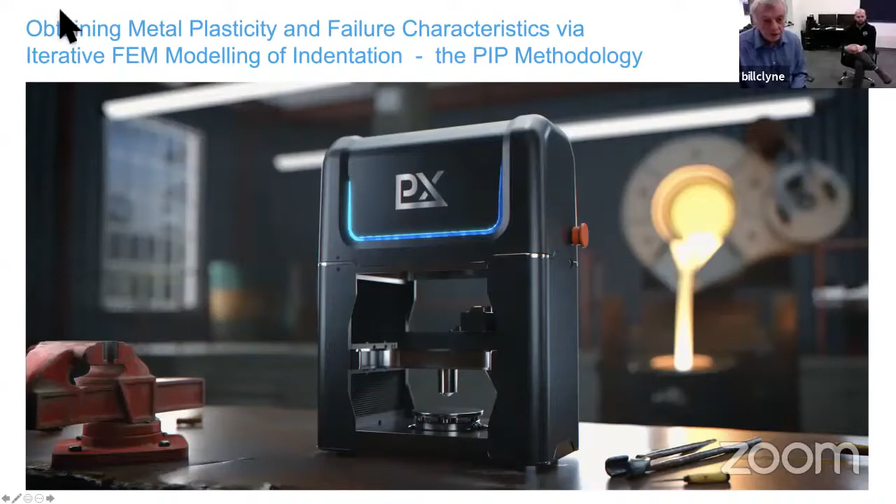So it is based on work that's been done in the university over the past couple of decades, really. But what's brought it into focus is that there is this startup company called Plastometrex, which is now marketing some products, and you'll hear a bit about the actual machine itself towards the end of the talk, although you can see a picture of it there. So let me just give you an introduction first to what is actually in the talk. So this is the structure.

I'm going to start off by just giving some background really to the concept involved. We call it PIP. It's based on making indents, measuring the indent profile, and then doing a repetitive, iterative FEM simulation of the process in order to converge on the best fit set of plasticity parameters. What we're trying to establish is the stress strain curve of the material. And although it does involve a lot of FE simulation, the whole thing takes place rather quickly. So, it's a rather tractable tool if you have an integrated system where you can make the load, create the indent, measure the profile, and then do the software, the iterative FE.

So here's the basic idea pictorially. You start by making an indent to a prescribed load using a spherical indenter, a relatively large spherical indenter. You measure the profile rather carefully, and then you need some kind of constitutive law to describe the plasticity. We use the Voce equation. There are alternatives, but you need to be able to simulate the plasticity.

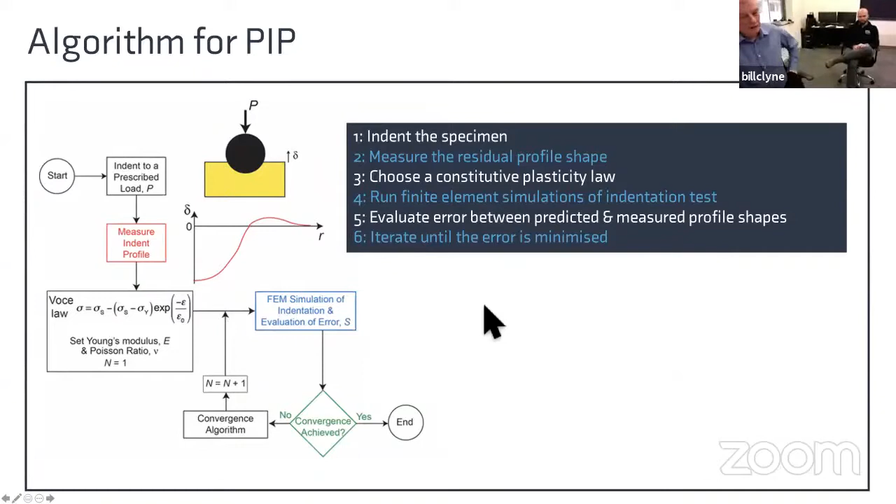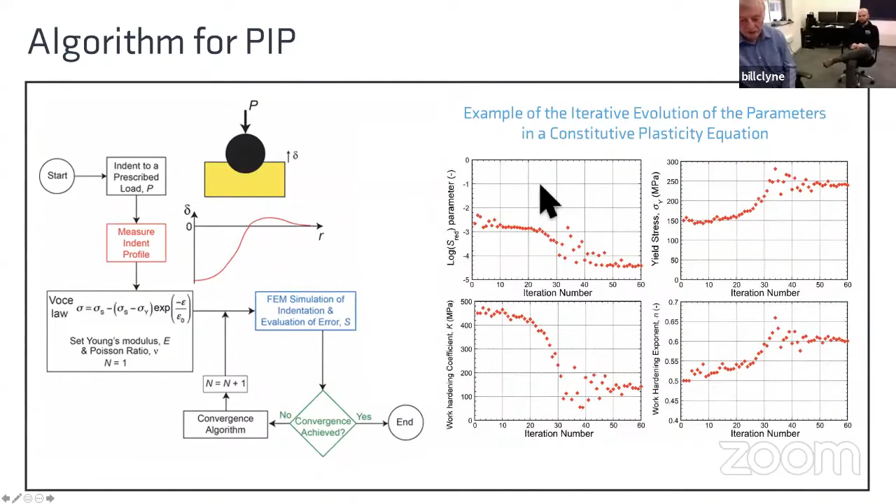So just emphasizing again the sequence, you create the indent using a large spherical indenter. You measure the profile. Here's some different profiles for different applied loads. If you're interested, you can start focusing on looking at the microstructure around the indents. This is showing these persistent slip bands in individual grains, so you can get some feel for what's actually going on inside the material. But the key procedure is then to repeatedly simulate the indentation process, and as I say, get the best fit between the measured and modeled profile, and then that gives you the true stress strain curve. That's what we're trying to obtain.

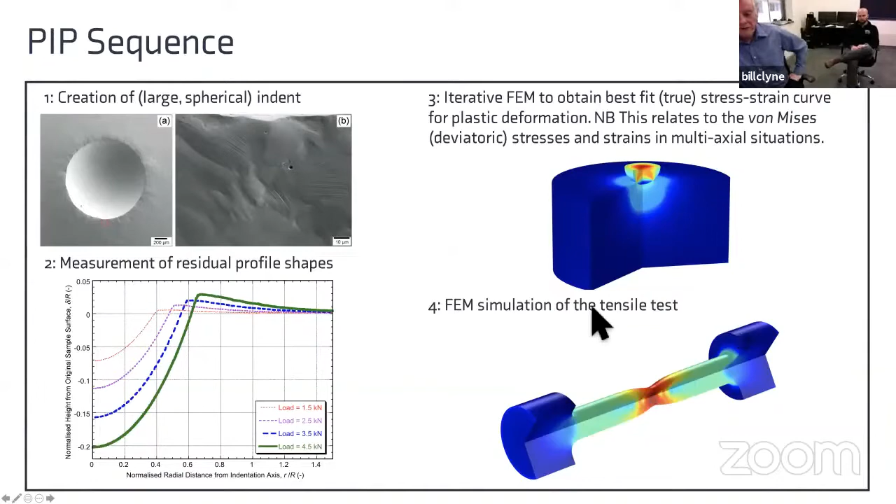Once you've got that, you can simulate all sorts of things, including the tensile test, for example. So you could put those true stress strain parameters into another model, and you can predict how a tensile test would proceed, including simulation of the necking, etc. Or you could do all sorts of other things if you wanted to. So that's it really, but there's a lot of subtleties in this to get things right. And of course, you do need to understand the difference between true and nominal stress strain fields.

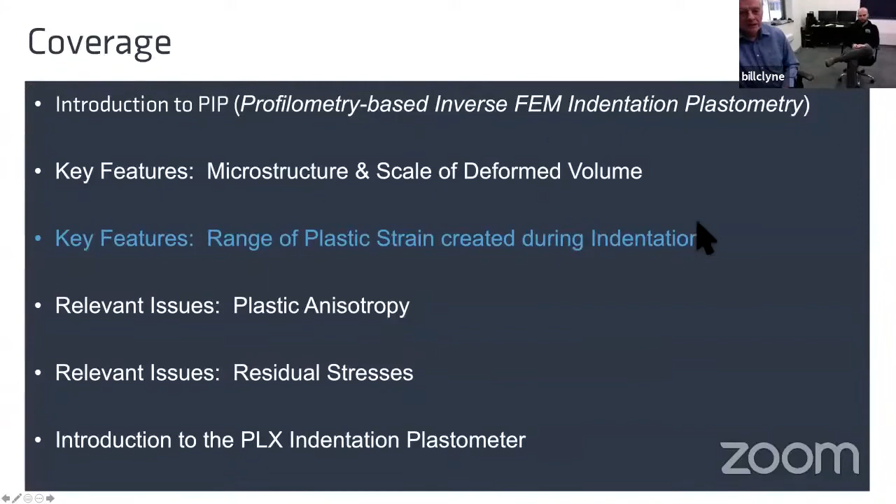And this is an important issue. What scale should you do this on? If you make very small indents, you'll probably be in single grains and you'll get very different behavior. Because if you want to capture the bulk response of the material, you do need to deform a relatively large assembly of grains, what you might call a many grain volume.

And the reason for that is that the way the bulk behaves depends on a number of things. It depends on things like grain size, texture, the structure of the grain boundaries, because that affects the ease of rotation and sliding at grain boundaries. And of course, the usual things that you might expect anyway, dislocation density, precipitates, etc., etc. But it is important to deform a many grained volume.

And what that translates into, if you recognize that the grain size could be anything up to 0.5 millimeter or even more, but this would be a typical range up to, say, 500 microns. That means you need an indent diameter which is at least around 1 millimeter, and probably an indenter radius of around 1 millimeter as well. One of the things this brings in is that you need a reasonably large load, depending on the hardness of the material, of course, but you're probably going to want something in the kilonewton range in order to create this indent. It's still relatively small on a macroscopic scale, but it's not small in the sense of being what you might call nano indentation, which is much, much finer.

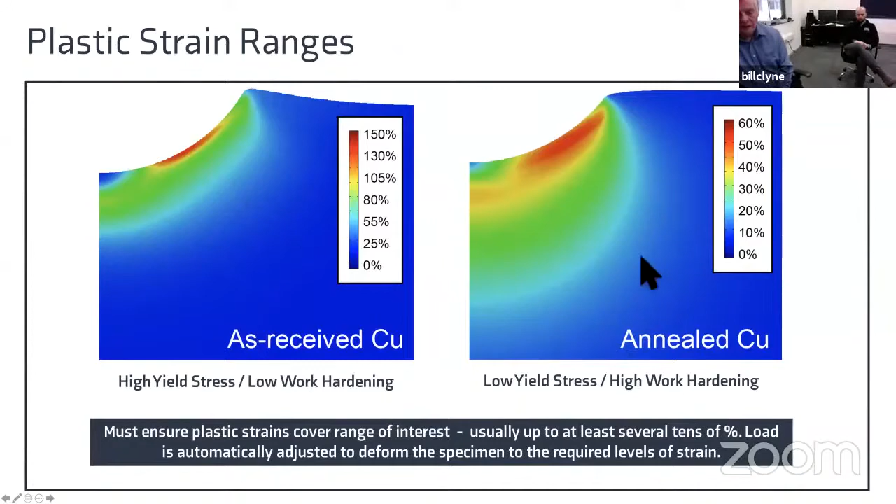Okay, I think at that point, I'll pass over to my colleague, Dr. Campbell, who's going to give you some more information about some of the issues that really turn out to be important in some cases. Things like the material being anisotropic or there being residual stresses present. So over to you, Jimmy.

Thanks, Bill. So, as Bill said, there's two issues we're going to look at. The first one being plastic anisotropy, and the second, residual stress, which may occur in materials that we're going to conduct our indentation experiments on. So, if we look at anisotropy first, one area where we might see significant plastic anisotropy is in additively manufactured

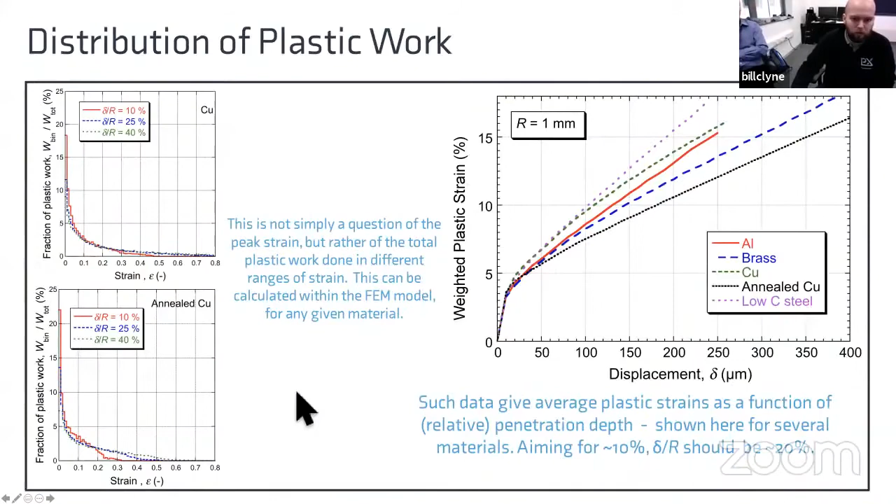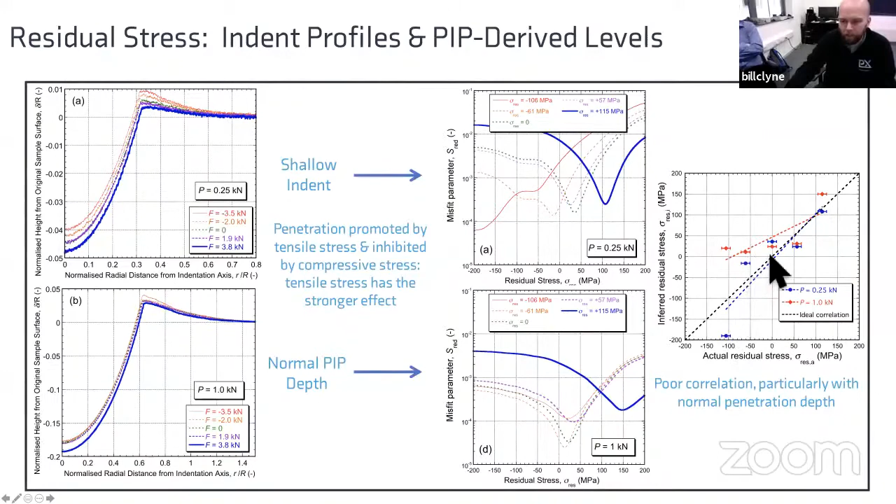And this is summarized in this plot here, which shows the inferred residual stress against the actual residual stress. And we can see that at low penetrations, we're getting a reasonable agreement in terms of at least the correlation, but there's a lot of scatter around that. And then at the higher depth, we're getting very poor sensitivity to the residual stress.

So one reason that you can look at to sort of explain this is that after a reasonable penetration, the radial stress fields look quite similar, whether there is no prior residual stress or a tensile residual stress here of 115 megapascals. So you can see that the field is dominated by the plasticity that has occurred. And that may help to explain why we don't see very good sensitivity to the residual stress.

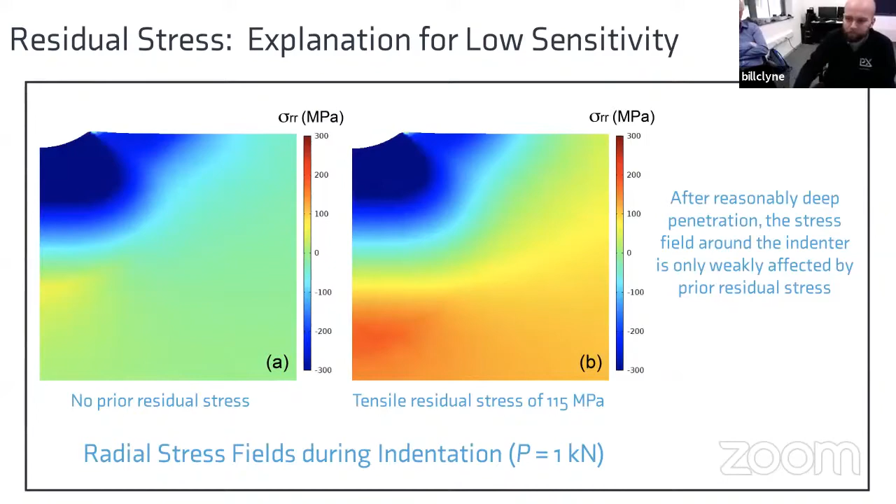So what's the outcome of this if we just ignore residual stress and only try and infer the plasticity parameters? So in our model, we keep the residual stress set to 0, and then we try and infer with different sets of indents where residual stress had been present.

So we can see at the low loads, the effect on the yield stress, so the yield stress in this case is 200, is reasonable at these lower depths. So we can see it drops down to 100 or up to 250 when we have residual stresses, which are 180 megapascals, so quite high in this case. As for the UTS, which should be around 260, we can see that there's a very large spread, and this value can go up quite significantly. So that's all for the shallow set of indents.

In the deep indents, the effect is much less, as we might have expected. The effect is much less marked. So the compressive residual stresses will have a very small effect on the yield stress, and indeed the UTS at large penetrations. And the tensile residual stresses we can see have more of an effect on the yield stress, but almost no effect again on the UTS. So again, for relatively deep penetration, we can see that the effect of the residual stress is much less significant than at low penetrations.

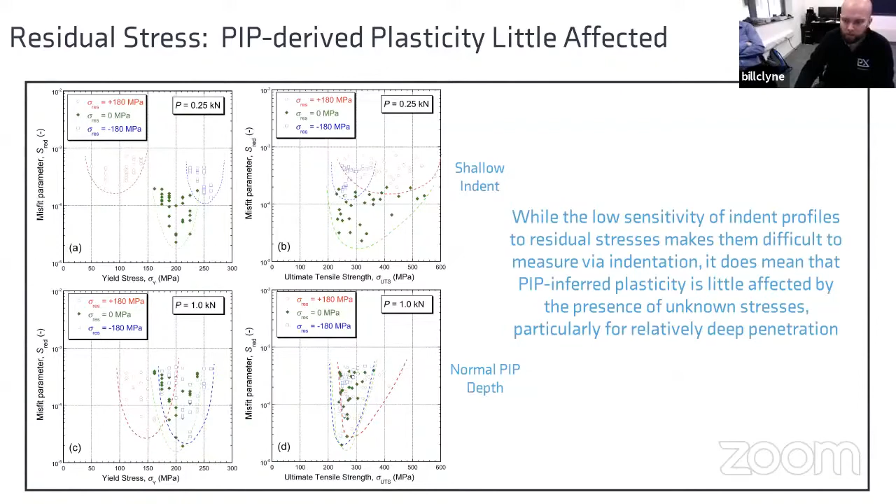Okay, so finally, I'd just like to introduce you to the Plastometrex indentation plastometer. You can see here the key components are labeled. So we have an indenter with an LVDT, base plate, and an integrated profilometer. And I'd just very quickly like to show you an introductory video from the plastometer.

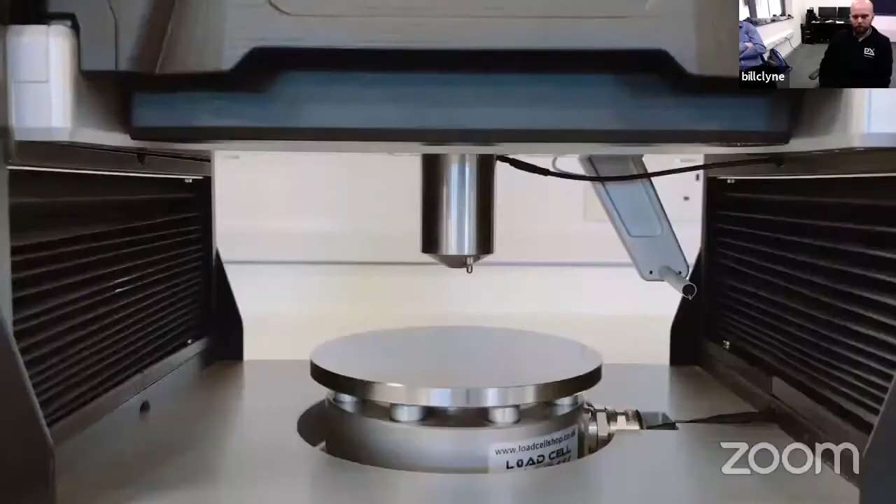Welcome to Plastometrex. This is one of our indentation plastometers. And today, I'm going to show you just how simple the workflow is. Here, we have some aluminium plate, and for sample preparation, we've done a quick surface grind, and we've ensured that we've got a flat surface for indentation. To run a test, place the sample underneath the indenter head. Once you click start, the indenter head will come down, and the LVDT will come into contact with the sample surface, and the indenter head will pause. This allows you to make any fine adjustment to the position of your sample for the test. Once that's complete, everything from this point on is automated.

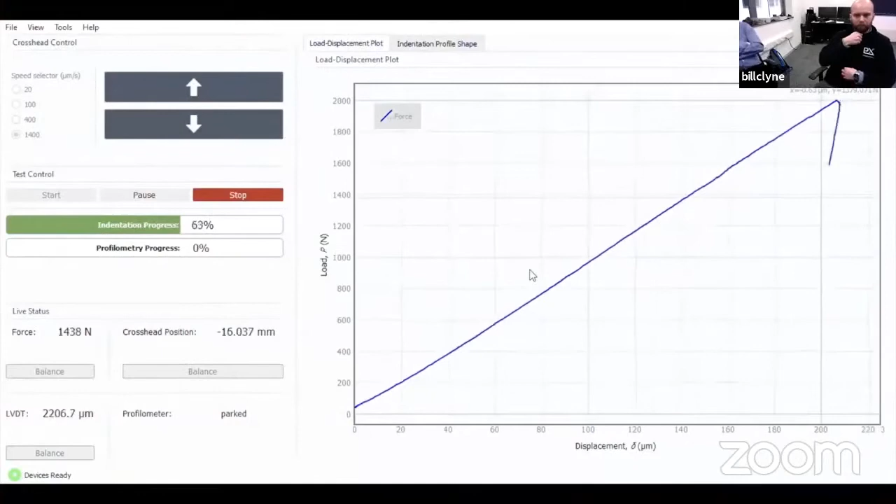The indenter comes down and touches on the sample surface and then begins to indent. If we look in our Corsica software, we can see the load displacement plotted as it is being acquired. Once the indenter has reached the appropriate load, it then unloads. The profilometer now comes across. The sequence the profilometer follows will be that it touches down on the sample surface, it then moves to within the indent and finds the center of the indent. It then moves back outside the indent and performs a scan straight through the center of the indent.

Now we move into SEMPID, which will convert our residual indent profile into stress strain data. The user must then specify the material. This is important as it defines the stiffness which will be used in the calculation. Here we've indented aluminium, so I will select that as my material and perform the analysis. This will typically take around 10 seconds. Now that the calculation is completed, we can see here we are using the Voce plasticity equation, and underneath are the parameters that SEMPID has calculated in that equation for our stress strain data.

On the plot, the dotted line shows this plotted as a true stress, true strain relationship, and the solid line shows that true stress, true strain relationship converted to a tensile nominal stress strain. This also allows the calculation of the UTS, or ultimate tensile strength, which here occurs at approximately 10%.

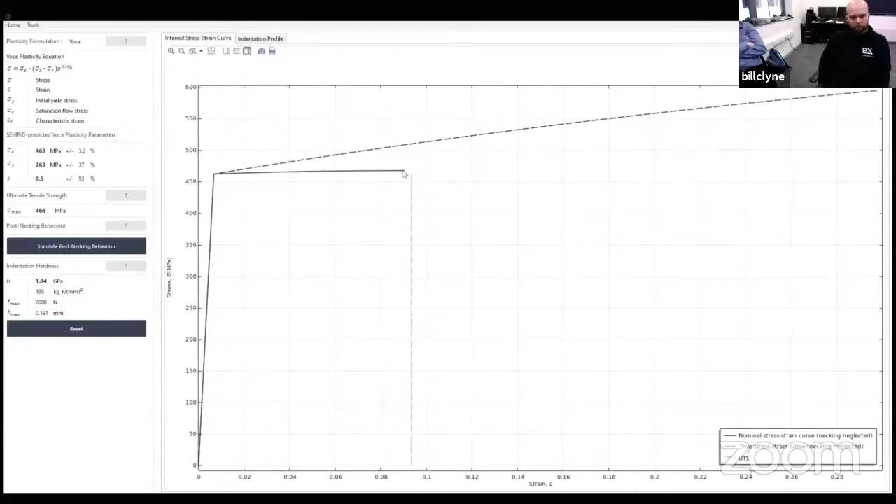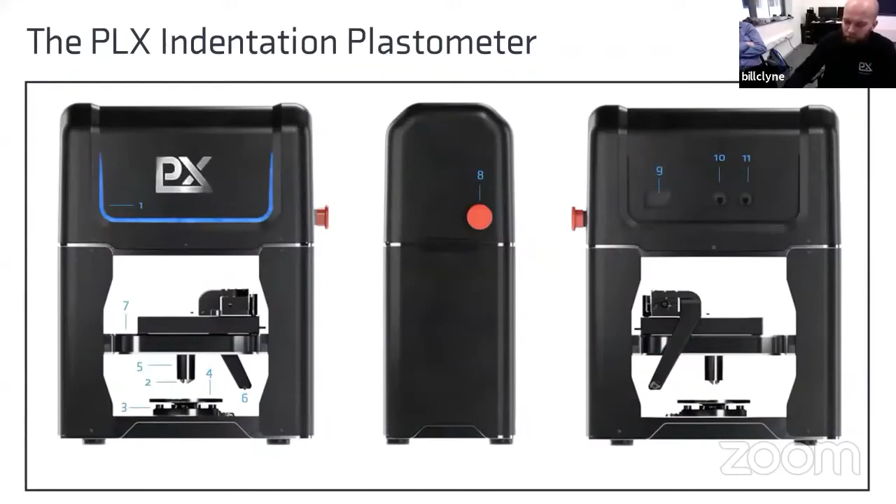Okay, so it's just a short introduction video showing you a bit about the workflow. So in summary, we've looked at inverse FE modeling to infer the stress strain properties of metals. It's a transparent process. However, for it to be reliable and accurate, we've got to satisfy several conditions.

First, as Bill outlined, is the scale. To ensure that the bulk characteristics are captured rather than just those in a single grain where the properties are highly anisotropic. And we don't actually capture all of the properties, such as the influence of grain boundaries. We must ensure that the diameter is large enough, typically of the order of a few millimeters, to make sure all of the microstructural features are captured.

Spherical indenters are typically the best ones because they don't have any issues such as sharp corners, so there's no problems with the modeling. And the residual indent profile is a much more sensitive outcome to the properties than the typically used load displacement plot. To characterize plasticity over a useful range, we've got to probe relatively deeply, around 20% of the radius, which means if you're going to use a millimeter-sized sphere, you need loads in the kilonewton range.

We then had a look at anisotropy, noting that indentation is multi-directional, so we get a direction averaged response. And we looked at the case of a nickel-based superalloy. Residual stress can affect the process, but the sensitivity is low. This is especially true for larger penetrations, although it can have some effect at lower penetrations.

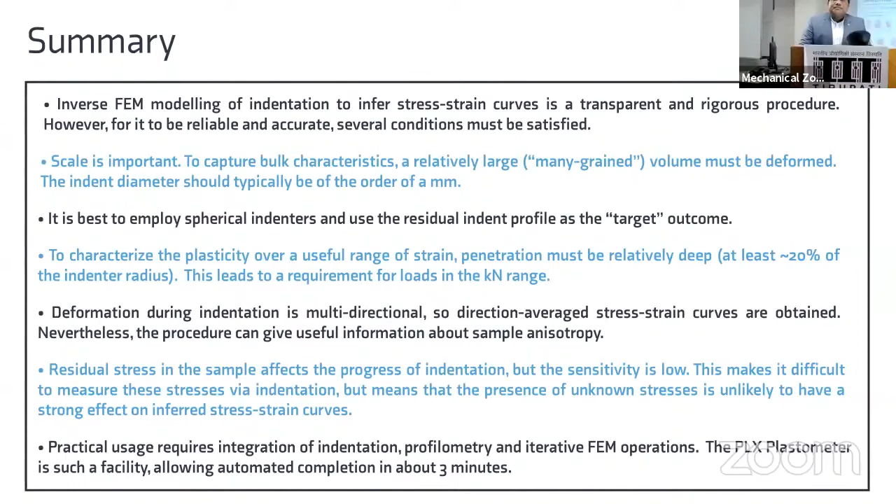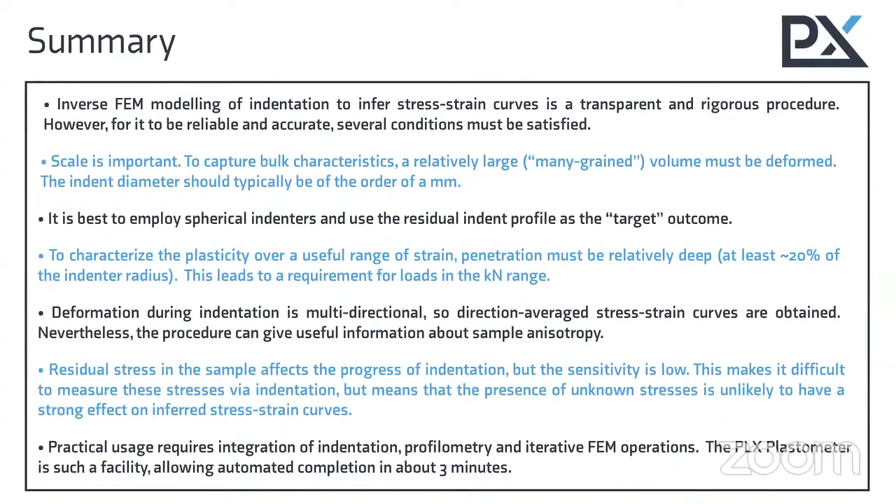Hello. Somewhere in the slide you have shown that using EBSD measurement, you have shown the two cross sections, basically two planes of the additively manufactured nickel-based superalloy, and then we are calling it as some kind of texture is present, 101, I guess. And then when we are seeing the residual indents, and we are comparing the shape of those indents, is that shape coming because of some crystallographic texture, or is it just the grain morphology which is resulting in this type of shape change?

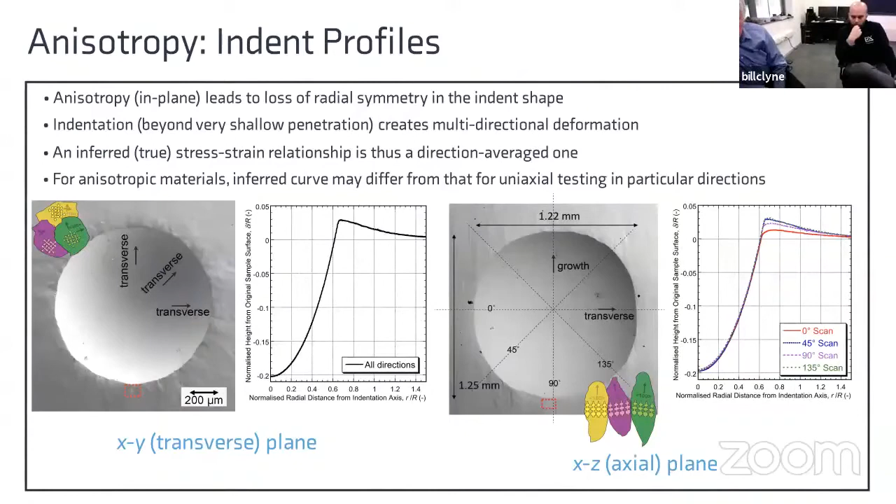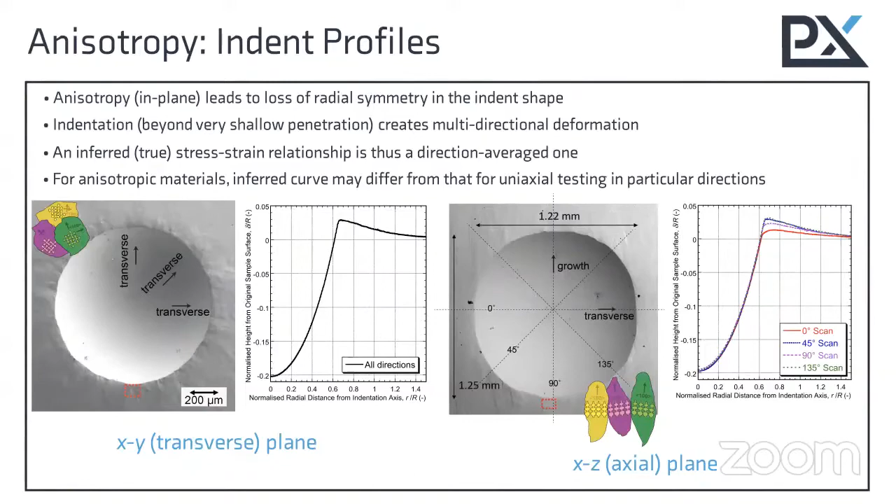I think you're asking whether it's the shape anisotropy of the grains or the texture that's causing the effect. Yes, well, we're just seeing the outcome, but I would expect it would be the texture that would have the strongest effect. The shape of the grains is relevant. On one plane we are seeing very elongated grains, and on the other side more equiaxed grains. So is it just the effect of grain shape, or texture? Both could be contributing, but I think it's the texture probably that's the most important.

What's happening here is that obviously assemblies of grains are deforming in a cooperative way. If there is no texture and the grains are equiaxed, then obviously you'd expect it to be isotropic, to deform in a similar way, no matter which direction you loaded it in. But if it is textured and if it has shape anisotropy, there will be some differences. And here you're clearly seeing that it's harder in transverse directions. So I suspect it's the texture that's the more important of the two.

Actually, we have seen some papers in the Journal of Additive Manufacturing on SS316, basically the steel, and there they have shown that because of the shorter slip path, this anisotropy comes in the bulk samples, like we are seeing here also. And I suspect that it may be because of grain shape also, like in the Ti64 and SS316 people have reported. Yeah, you're absolutely right. And unless you do some very detailed modeling, it's quite difficult to separate the two.

Certainly, the texture is quite strong. You can see that here just from these EBSD. I think there's a factor of about 4 from randomness in terms of the bias of 100 directions being aligned along the growth direction. So it's quite a strong texture, quite a simple one actually, but it's not simple to predict how that will plastically deform. You would need to do some kind of crystal plasticity simulations, maybe. Yes, it can be done, I'm sure. But all we're seeing is the net outcome here. And you're quite right, it could be getting influenced by both shape anisotropy and texture.

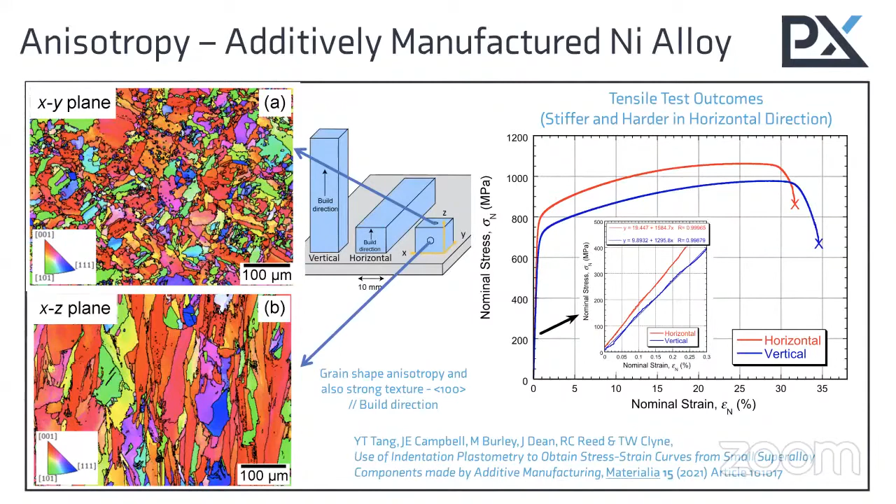Jimmy, do you want to take that? Yeah. So we're not considering the effect of voids in the onset of necking.

So if we look at this plot here, you can see that the nominal stress builds up to the maximum at just under 1100, and then the neck begins to form. That is just a geometrical effect, and indeed was predicted by Considère a long time ago. The beginning of the formation of the neck is a geometrical thing. You can predict it both from FE or just from converting the Voce equation in its true form into the nominal form, and again you'll predict a maximum, and it's then just the instability that will lead to the neck forming.

In terms of, if your question is related to porosity and voids in additively manufactured materials, certainly they can act to promote fracture prematurely, maybe earlier in the necking, once the material has necked, or maybe even before necking, and that is something that we can't capture with indentation. The stresses in general are compressive, and therefore we're not stimulating any fracture during the indent. But there is no consideration of voids in the simulation, because actually you predict the neck without any voids. That's just a continuum.